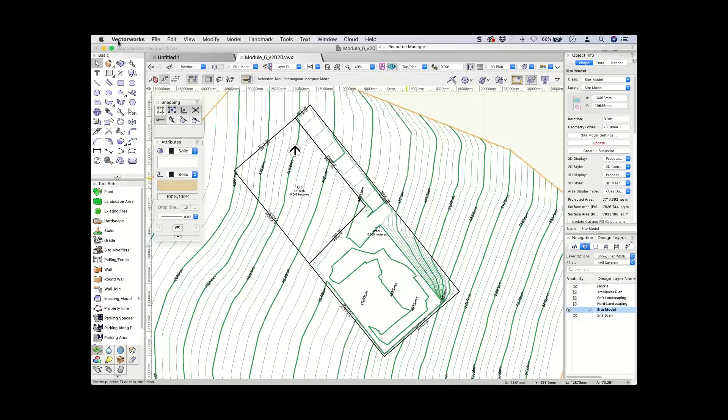So you guys can have some time to come up with more questions. We've got another question from Richard, who would like to see the various site modifier modes again, especially when you use the retaining edge. So that's a good one.

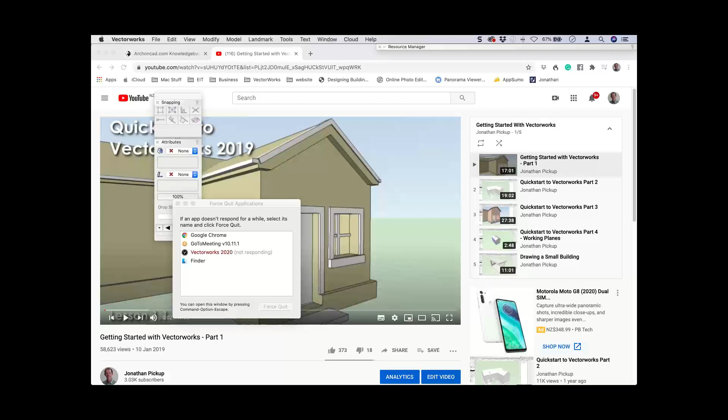So what I'm going to do is create a site model from scratch using polylines. Let's create some polylines. I'm just going to make a rather ordinary site model, and it won't have too many points in it, so it won't take too long to create.

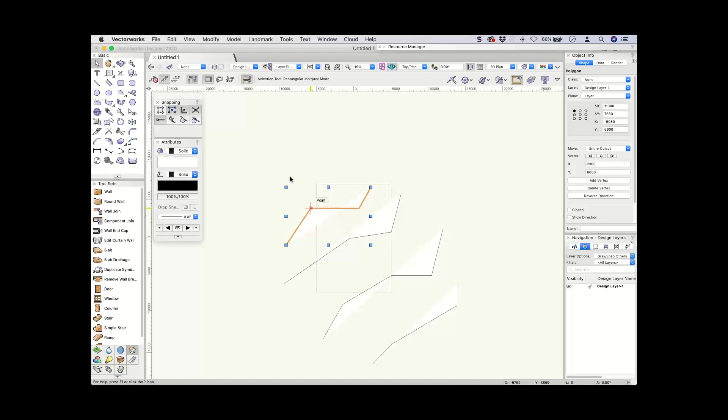One of the easy ways to create it, I don't know if anyone noticed, but I started with this. Oh sorry, do you want to start recording again, Barbara? Yes, we're going, sorry. So I started with a few basic polygons here.

Let's have a look under Landmark. There's a thing called 2D Polys to 3D Source Data. This assumes that you've started your polys at the lowest level, and I have. So my start elevation is 16 meters, and my interval is 2 meters apart.

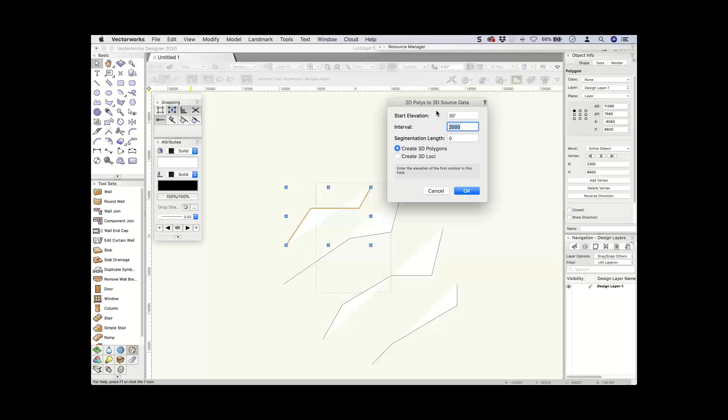Should we make this 30 feet? I think nearly all of you are American. So 30 feet apart, 6 feet apart, and I'm going to create 3D loci.

And it finds the first one, great. Yes, it only found the first one. Weird. Let's do that one again.

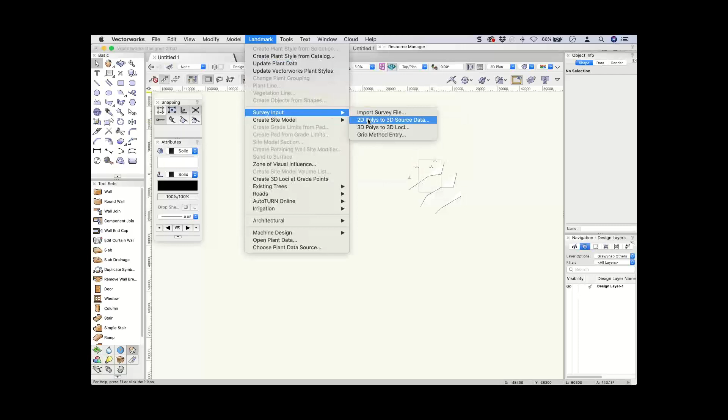Survey input, 2D polys. Where's it gone? It should find all of them. So what was it? That should have been 36 feet with 6 feet apart.

That's better. Okay, let's delete my originals. So I should have a lot of 3D locus points around. Let's select them all. And then they all are.

So we select all of those, then we can make a site model. So Landmark, Create Site Model, and create the site model from my source data.

There it is, and my general display shows maximum elevation, minimum elevation. Do check these maximums and minimums to make sure you have got all of your points and you haven't got one at 0 when you don't need it.

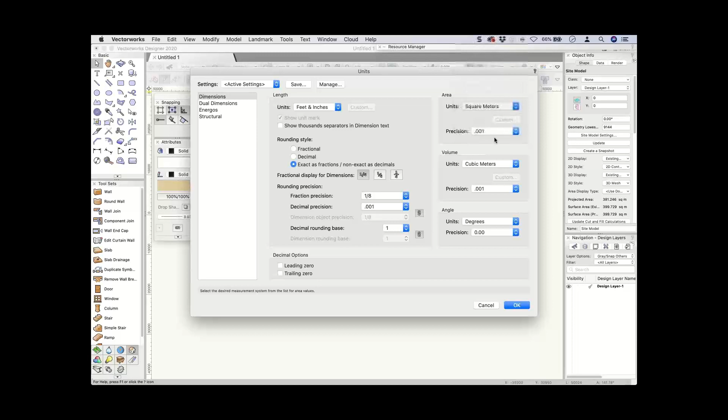So these are going to be 2 feet apart, and the contour is going to be 2. Now I'm just going to change my units to feet and inches, under Document Settings, Units. I'll also change this to square feet, cubic yards. Okay, so there's my site model.

It's reasonably steep, so it's steep enough to do some of this stuff. So first of all, Scott, your first challenge: being able to use this to cut in something like a wine cellar.

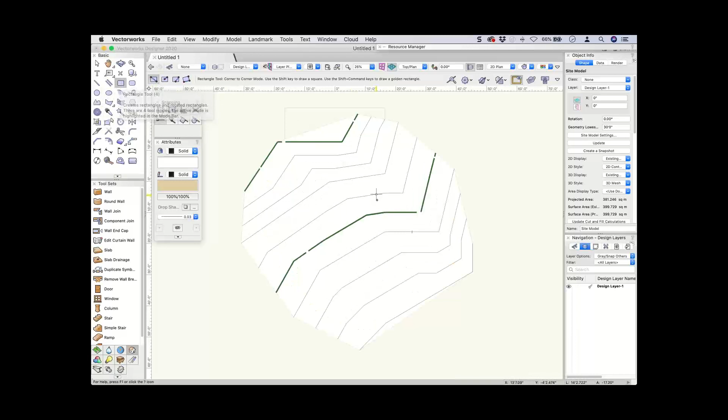So let's say, for example, there's our house. Should we just draw a house there? There's our house. We want to put in a wine cellar somewhere.

Now, there's a couple of ways to do it. One way might be to use something like the Site Modifiers tool, this one here, my bulldozer. The Site Modifier tool will create a site modifier. We can create grade limits, I'll get into that, a contour, or a pad with retaining edge. So one thing we might try is a pad with retaining edge.

This is what you're talking about, I think, Richard, the retaining edge, which I sometimes like and sometimes don't like. And so I'll go through some of those settings. This is a spoil pile and this is a texture bed mode. So I'd like to look at perhaps the contour mode and this pad mode.

So first of all, Richard, sorry, Scott. First of all, Scott, let's just draw your wine cellar, and we'll go yes to that. And here's my wine cellar, and I'm going to change this to an elevation. Where's my elevation? Elevation here. Let's make that 30 feet, because I know that 30 feet will be okay. And this is my house.

So at 30 feet, when I update my site model, and what do we want to see? 2D, we want to see 2D contour smooth. We want to see proposed and existing. And 3D, we want to see proposed only. And you can see it there. It's created a hole. But what you might notice, Scott, is that when it created the hole, it didn't limit the amount of cut for that hole. So what we really wanted was a pretty steep side.

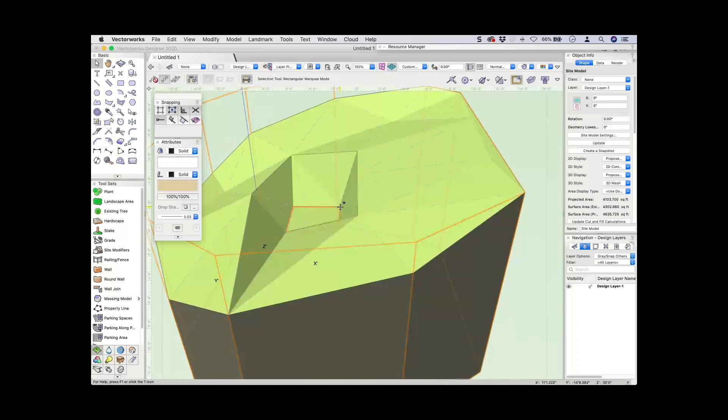So what I'm going to do now, I'm going to change this to a pad with retaining edge. Let's update my site model. And it hasn't changed because what we do need to do with this pad with retaining edge is to make some changes to it. Here, let's just go to here. It's a pad with retaining edge, and I'm going to go send to surface. So let's go landmark, send to surface. I think I can right click on it and go send to surface as well. Is there a send to surface? Oh, it was there, wasn't it? Send to surface there.

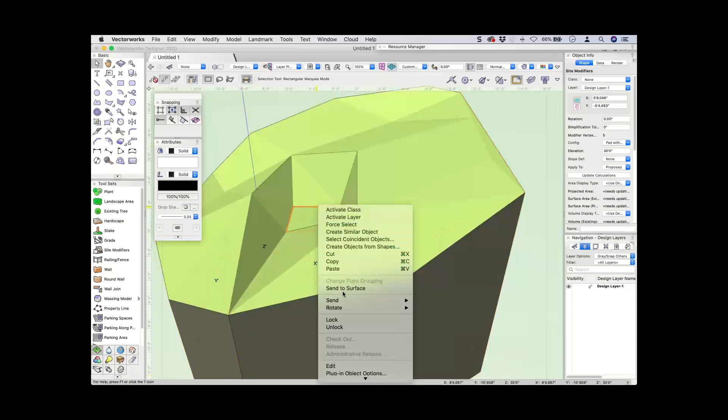So what do we want? We want to elevate the retaining edge or fit the retaining edge or elevate the pad. I'm going to go to fit the retaining edge, and it should give me the opportunity to send this retaining edge to the boundary, to the edge of my site model. So I didn't do that. Send. So it's a pad with retaining edge. That's correct. Elevation 30, slope definition 0. And I want that to have the retaining edge on it, and it's not showing up.

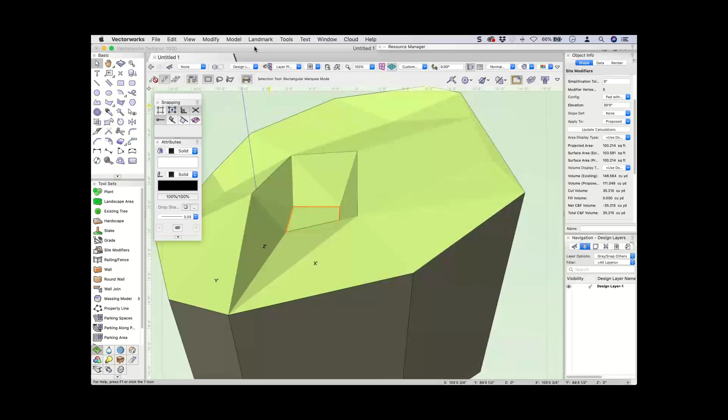So landmark, send to surface. I want to fit the retaining edge. Now, normally it asks me which edge to send it to. So since it's failing to do what I want, I'm going to do what we talked about, Richard, some time ago, and that is I'm going to create a site modifier around it to be a grade limit. A grade limit will limit the extent of my cut. So that's a grade limit. So when we go update this, we should end up with that just fitting.

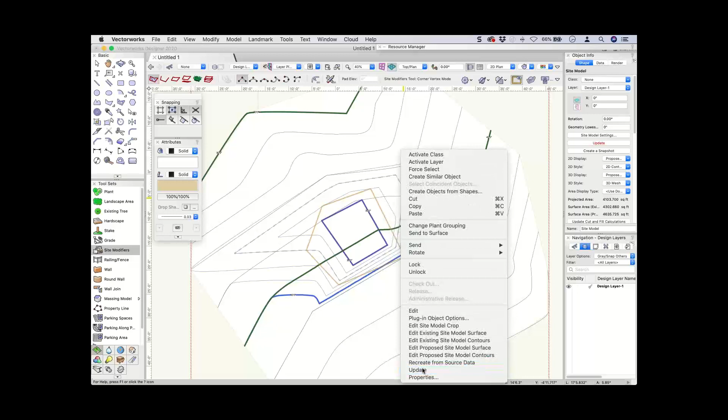So, Scott, let's talk about some rules. Rule number 1 is you can't have a cave. And what that means is that you can't put a site modifier like a cellar, wine cellar. It can't actually go under the site. We can't make a hole underground. So that's number 1. If you want to put a wine cellar in the lawn and have lawn on top of it, I'm afraid you're going to have to do 2 bits.

One is you're going to have to make the hole for the wine cellar and the edges. And the other thing you're going to have to do is to put a form on top of it to close off that site. Now, an easy way to do that would be to do something like make a copy of the site model and shorten it so it matches exactly.

So let me go back to your original question, Scott. You want wine cellars. Okay. Your wine cellar's off to the side, so there's no house over it. That's cool. So I think that looks at the basic strategy, that you can just create something that's a site modifier. I'm going to delete these parts again.

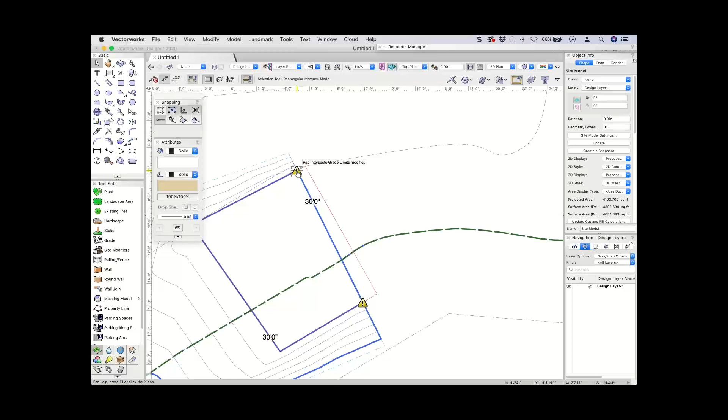So what you can't do is, so this is my grade limits here. If I make this grade limits go over my site modifier, like this one, and I update, I start to get error messages. These error messages are telling me that the pad intersects the grade limits modifier. You're not allowed to do that. Now I know that Vectorworks does it because it works, but sometimes the results in 3D are not what you expect. They can come out a little weird.

So for example, in this case here, you can actually see that my pad modifier is going underground. It's actually going under the slope here, and part of it is hiding under the ground, so it's not correct. So Vectorworks doesn't like those parts, and it won't do them effectively. So let's get rid of that. Let's update this again.

Update. So Richard, you wanted to look at the various types. So let's go back to our site modifier tool. The contour is a really easy one to use, especially if you use this one here with the snap to contour elevation. So I've got some contours here. This one's at 40 feet. So I should be able to click on that one.

Then I can start to move these around. Now, I'm just going to check to make sure it's updated, and my site modifier, because what should happen is, I don't know if you noticed that one there went red. We're looking for these to go slightly red so that we can then use those to link to, and then what Vectorworks will do is it'll measure the elevation of that contour, and it'll set this modifier at exactly the same contour.

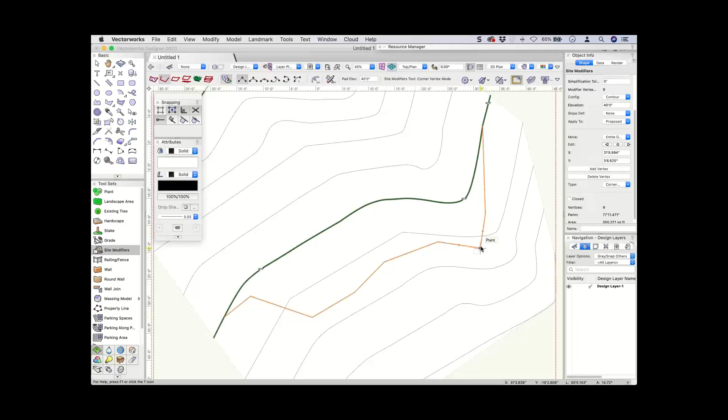You can see here it's set it to 40 feet because I started on that 40 feet one. And this one, it's measured the edge of that contour, and if I make some contour lines like that and finish, that one should be at, I forget what I made it, something like 38 feet. That's cool. So let's update this site model and see what we get. And you'll notice that I'm showing both proposed and existing. Let's show proposed only.

So it's a little confused. Here's my 40 contour line here, and you'll notice that even the contours way back here have been affected. And they've been affected because I haven't created a grade limit. So I haven't said limit my changes to this area. So I need to go back and put in a grade limits. So my grade limits needs to go around this area that I want to be affected, and through this area that I also want to be affected.

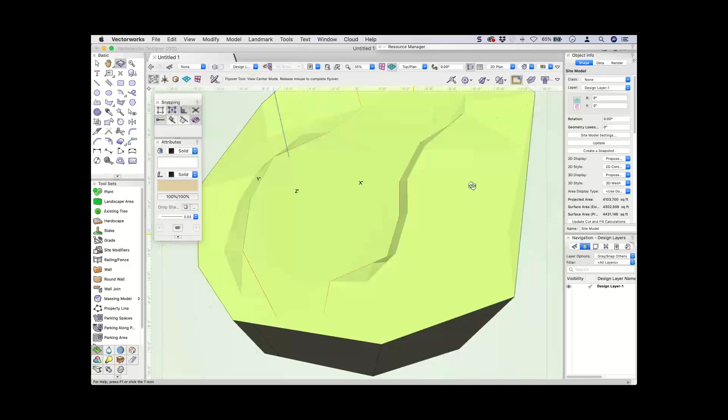Now, the closer I make these to my original shape, the steeper the batter will be, the steeper the edge will be. Where did we start? Over here somewhere. And let's update again. Right-click, update. Now you can see that I've changed the amount that I've been affected by just to where my grade limits is. If we look at this in 3D, you should see that it's reasonably steep. So Richard, I've got a reasonably steep batter on this edge and on that edge.

So some landscapers like this contour mode because this is how they often think. They think about changing the contours more than changing other things. Is it possible to do this some other way? Absolutely. If we right-click and we choose, where's it gone? Edit proposed site model contours. So these are the 3D contours of my site model. So I can actually double click on one of these and I can move it.

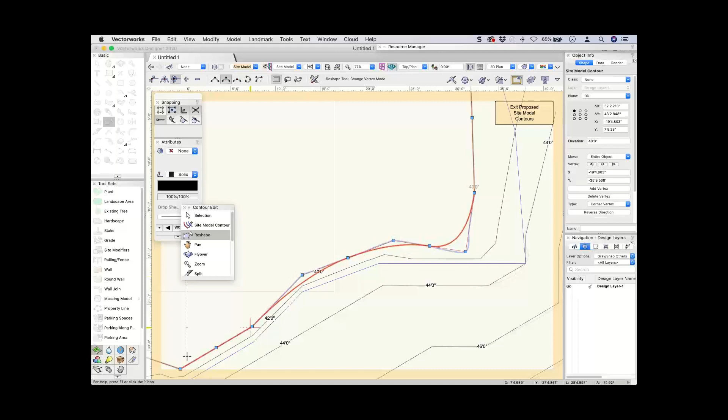So this is a 2D part, and what I might want to do is change these to more Bezier type shapes. Let's go and exit. And I think I might need to update. Do I update? So why didn't it change? Because of the way Vectorworks calculates the shapes. It calculates them not based on the curve of the polyline, but based on the points of the vertices. So the more vertices you put in, the smoother the lines become.

And now I have chosen smoothed. If I choose them unsmoothed, you'll see that some of them get steeper, but if we smooth them, it tries to smooth them out.

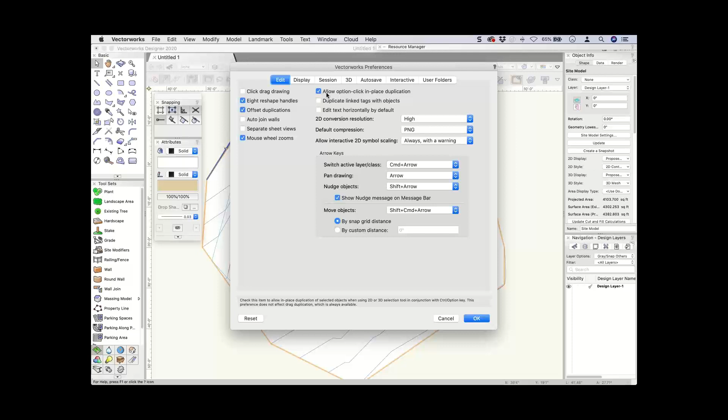So Scott, you said that you've got a cave, so you're going to have to copy the site model and place it over the cave. And one of the ways of doing that is to duplicate the site model. There's a quick way to do it. Let me just go back to my Vectorworks preferences. Allow option click duplication, or on a Windows machine it's called allow control click in place duplication. So if I do that, I can go option key click. I've now got a copy of my site model. It's a completely separate one.

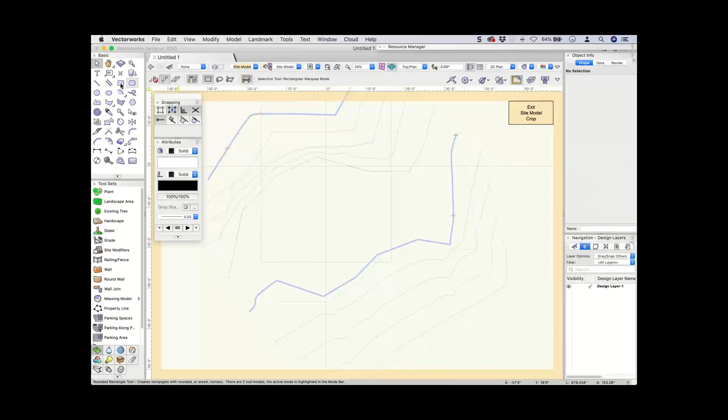And what I would suggest is use the site model crop, delete that shape, draw a rectangle to represent the shape of your cellar, exit the site model. So what I should have is two site models. And there you can see the two site models. The one at the bottom, you just change the bottom of that. So if we go to the site model settings, we'll change the minimum elevation here to, what was it, 38 feet, I think. And you can see you end up with just a tiny little piece of site model.

So let's just pull that over there. So we should end up with two site models, Scott. You can see the two site models. So if you made that one, it could sit as a lid on top of your wine cellar. It's not perfect, but Vectorworks won't do a cave for you, so I don't know what else to do. So that takes care of Scott.

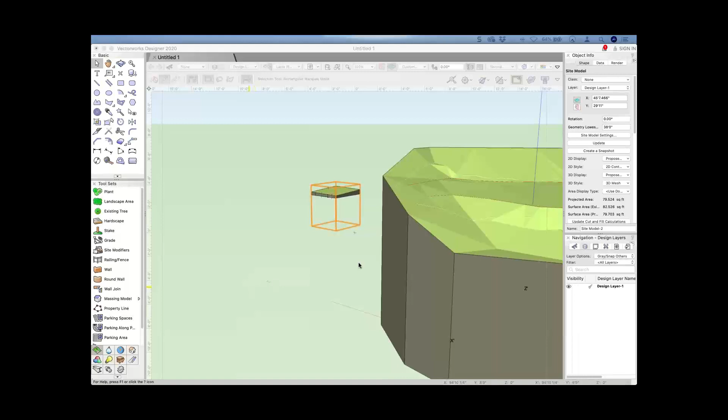So Richard, you wanted to talk about the various site modifier modes. I've got a real challenge using the retaining edge. It doesn't work for me in a lot of cases. Particularly if you're doing anything to do with the structure of the house or the architectural parts, where you've got several site modifiers close to each other that represent the different underside of the house structure. So if you're doing a basement and there's two different levels to the basement, don't use site modifier with retaining edge, just use a pad, because a pad works really well.

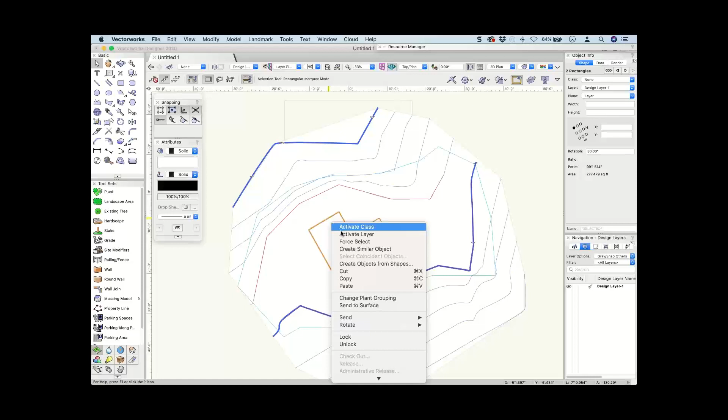I quite often make a pad by tracing around the shape of the house or the shape of my structure. Now you notice I've got these two just separated by a tiny little bit. So we select those two, then we're going to go right click. I'm going to create objects from shapes, and I'm going to make these into site modifiers, which is down the bottom.

So I'm going to turn off the Show Properties dialog box. I'm going to delete the source shape so those rectangles disappear. And I'm left with two site modifiers. Now these two are both at the moment grade limits. So I'm going to change those to pad. Let's start off with pad with retaining edge and see if we can make that work. So pad with retaining edge, the elevation of these, 38 feet. And I'll delete these other site modifiers that I've got.

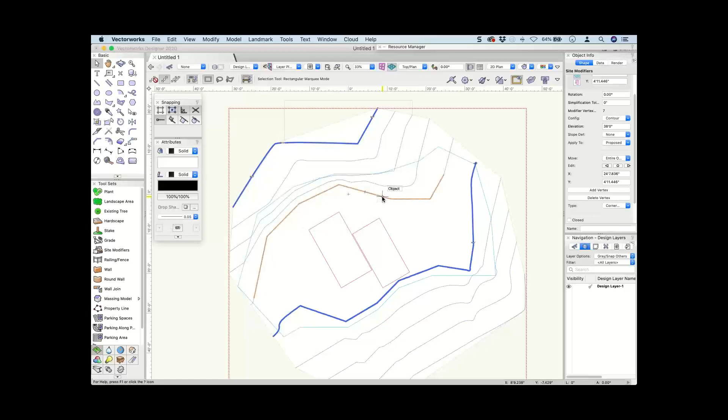Now sometimes I have trouble deleting or selecting a site modifier. You can see there that when I click, it picks up the site model. If I J-click, hold down the J key and click, you can see it actually picks up the dialog box with select coincident objects. And you can see there I can choose the site model or the site modifier. And now I can delete that site modifier. Once I've told Vectorworks I'm looking for the site modifiers, it seems to be that much easier to go and get them. Let's update my site model again.

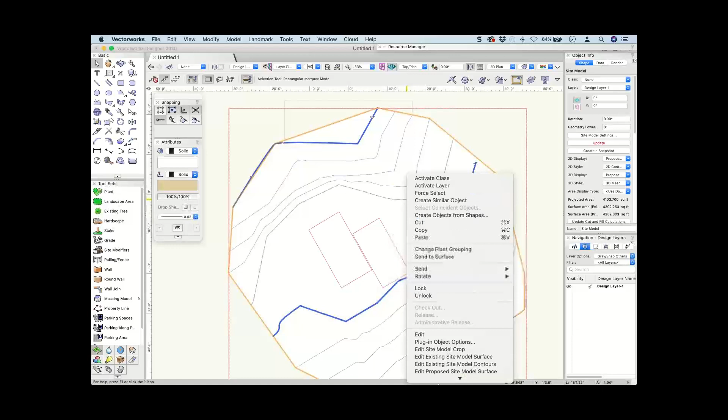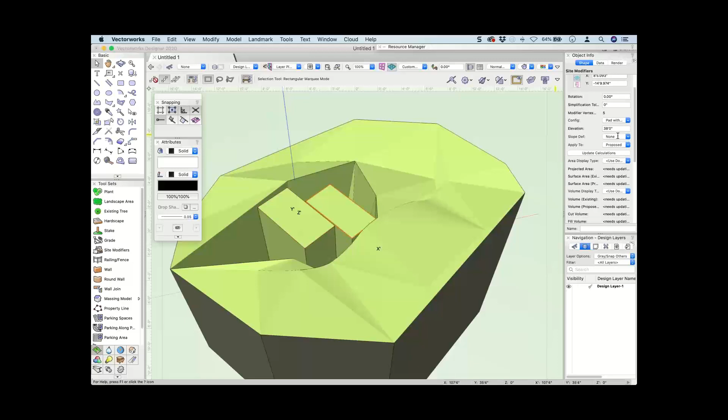Cool. So these two objects here, they're at 38 feet. And they should create some sort of hole. There they are there. Those are pads with retaining edge. Let's have a look. So it's pad with retaining edge, and the slope definition is none. And let's change the slope definition. The slope definition will be the across here. So is that right? 38 feet, yeah, proposed. That's weird because they're going all the way to the ground.

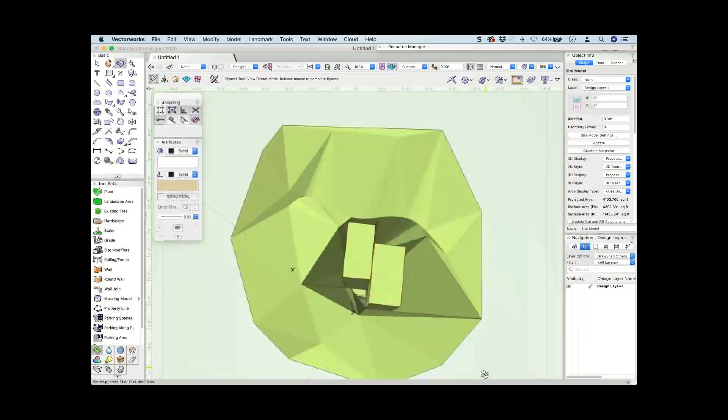Okay, so let's select that and that. Pad with retaining edge. Let's make sure that we've got here send to surface. Elevate the retaining edge: choose to elevate the vertices to meet the site model surface. That's what we want. Now that should have lifted up the edges. They should have come up high. Now if I update this again, it's still not working. There's something going wrong with that retaining edge, because they're at the right elevation.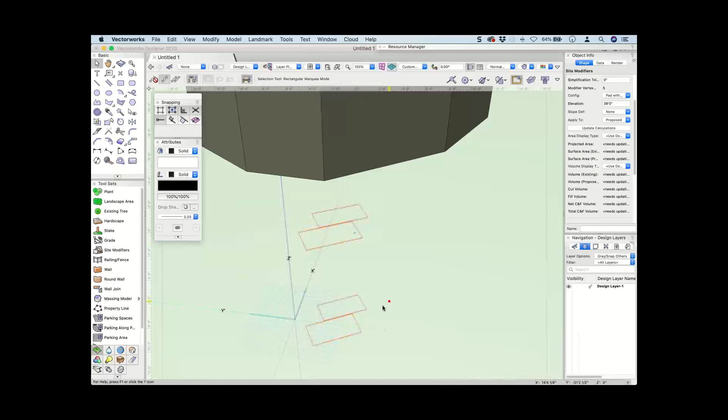But what I was expecting to find is when I do the lift, the retaining edge, I'm supposed to get a dialog box that asks whether I want to go to the proposed site model or the existing one. So I'm going to see if I do this one again. Let's go send to surface again. What's that? That's my site modifier. That's my pad with retaining edge. I appear to have two of them.

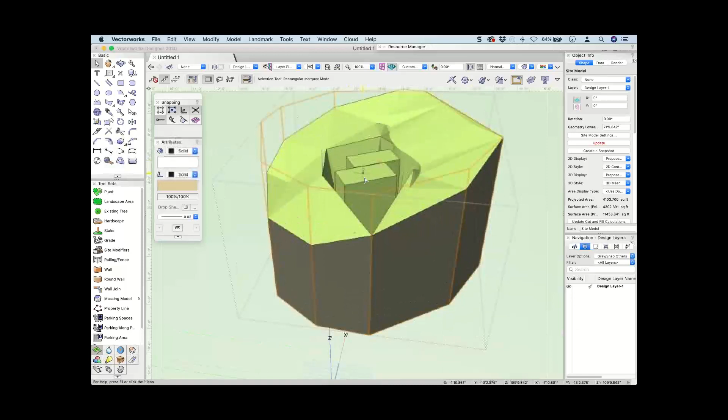Okay, let's not get rid of this. Let's keep those two. Let's send those to the surface, see if that works. Send to surface. And I don't know why I've got two of them. You can see I've got that one and that one. And now I think I've deleted my retaining edges. So what's that? Yeah, I thought so. Normally those retaining edges elevate to the site model, which is weird. I don't know if anyone noticed, but I've actually got two of them, one here and one there, every time I've tried to do it.

So I'm going to change those from pad with retaining edge to pad, and this should have the right 38 feet. That's 38 feet, isn't it? 38 feet there. Now my site model, I hope, isn't at the wrong elevation. Geometry lowest, I think I've accidentally moved this up.

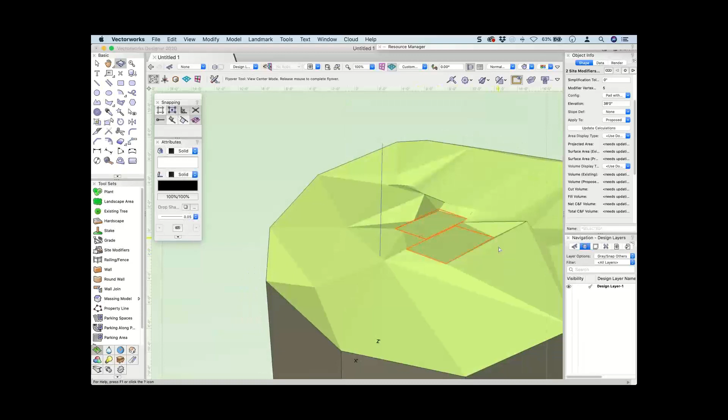That's better. That explains quite a lot. Okay, so those are my pads. That one, so again, J-click, site modifier, and that one. Now let's try this. Send to surface. Pad with retaining edge. Send to surface. Elevate. Okay, so there was a slight change there. They slightly elevated. Let's update this again. And there they are. So there's a slight part here.

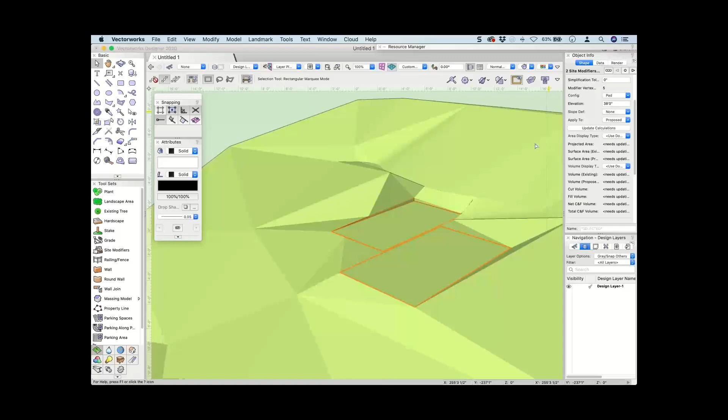And so Richard, one of the things I sometimes find with these is that if you send these to the surface of the site model, you sometimes end up with these pads putting a line between them. So when I've got two of them like that, I select that one and this one. What I tend to do with these is to turn them into pads only and put a site modifier around them. So the challenge we've got, Richard, is how do we get those site modifiers to give me exactly what I want, a really tight fit to those. We're going to make this 36 feet.

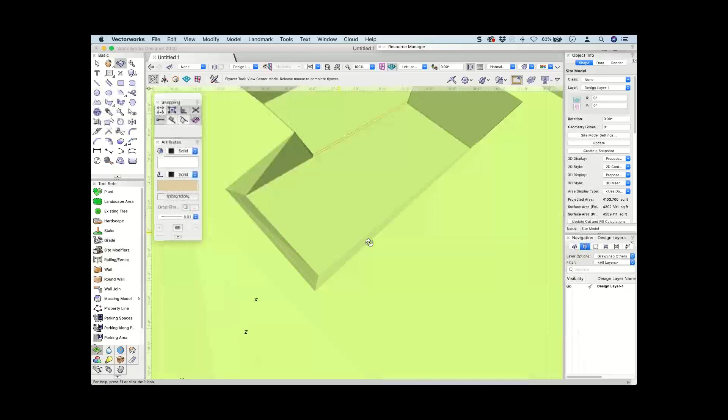So I'm going to use my offset tool. I'm going to offset a copy by 12 inches. I've got two of them. I'm going to right click, select them both, add surface, join those two together, and then change those from a pad to a grade limits. Now grade limits can go around several pads. So when I then update this one, I should end up with two different pads and the hole that I want. Like that.

And I can then select individual pad modifiers, that one, and that one can be at 38 feet. Let's update. Right click and update. So I can have different pads of different heights in the same grade limit. So if you want to make steps, I've done one recently where I made terracing down a hill, so I did that.

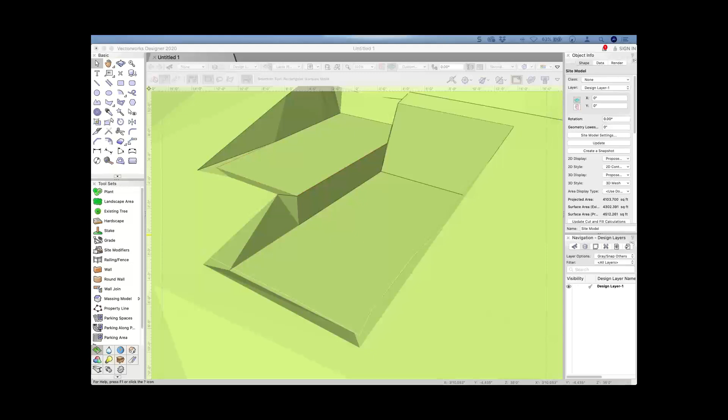Someone's asked, can the modifiers be touching each other? You can't touch modifiers together. I don't know if you noticed, but mine ever so slightly were apart. If they exactly touch, you'll get an error message, even if they just touch. So here, let me just go back to that. J click again, so I select my site modifier. I want to just touch those two together so they actually touch. Let's update my site model. And I've got an error message here because they actually touch. You can't have them actually touching.

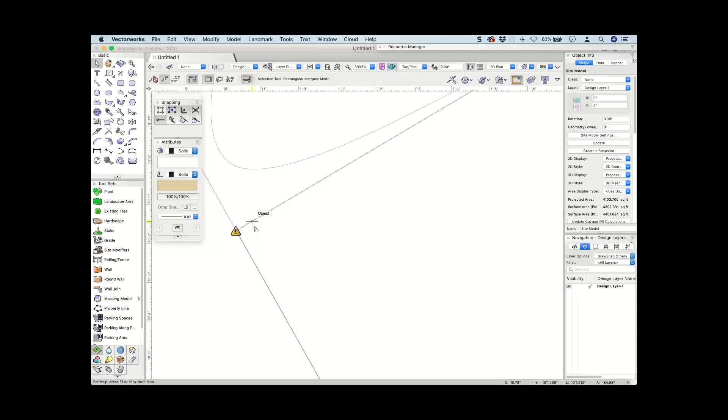How do we move that? Now I work in millimeters where I live. So what I often do is offset them by a millimeter, which seems to work. So J click on that one. And I'll offset this by a millimeter, which is 1/25th of an inch, which is almost nothing. So 1 millimeter. Okay, so you can just see it, but when you zoom out, it looks like they touch, but they don't. And that'll be enough to stop the error message.

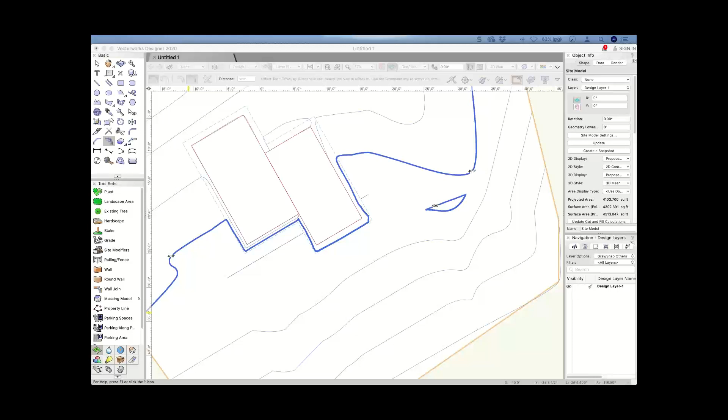I would also be interested in Richard's question on site modifiers. So Rod, is there a quick way to enter minimal site data without a survey? I'm not sure if I just did that for you by doing that. But there's a couple of ways to do it. So Rod, one way I'd suggest, I've got something going bing on me at the moment. Okay, so let's get rid of this.

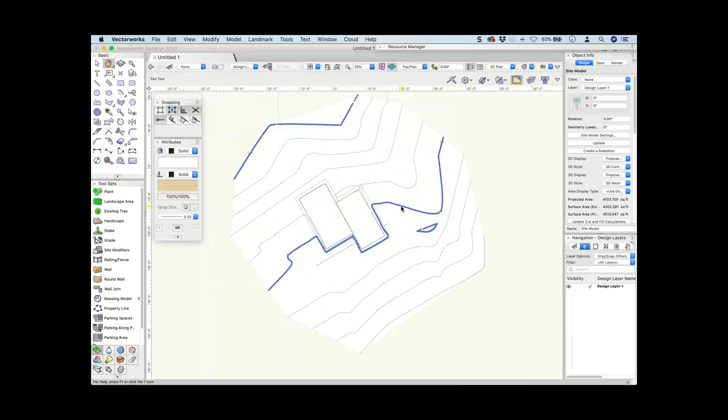Do we have a site model we can bring in? I'm not sure I've got one on my desktop that I can bring in at the moment. I don't have one handy, but don't forget that you can use the stake object to quickly create a site model.

If we use the stake object, let's say for example we've imported an image from a council building. I've got council drawings that have got contours. I'm going to include as site model data. I'm going to use a cross. I just like a cross, you don't have to. And so what I'm going to do now is say my elevation is 30 feet. And then you can place a couple of these.

Yeah, so that should be fine. So I can just place a couple of these. So those are 30 feet elevation. And then I can change this one to 34 feet elevation. So I've got another contour line at 34 feet. And I can place those again.

One at the end. Let's just cheat and we'll just jump straight to 40 feet. 40 feet elevation, let's put some of those in. And then select all of those. Don't forget your select similar tool. Select all of those, Landmark, create site model. And it will create a site model from those stake objects.

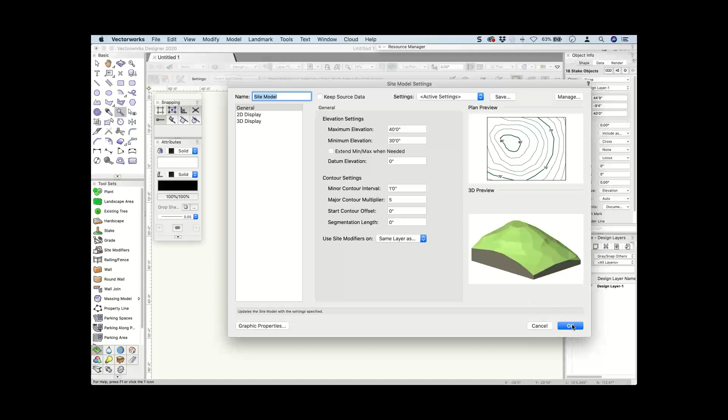There it is. If you want to add extra stakes to it, right click, recreate from source data is the option. It used to be called something different, but it's now called recreate from source data. And we go, oh, we've got some more information now. What we'd like to do is we'd like to put some in at 38 feet.

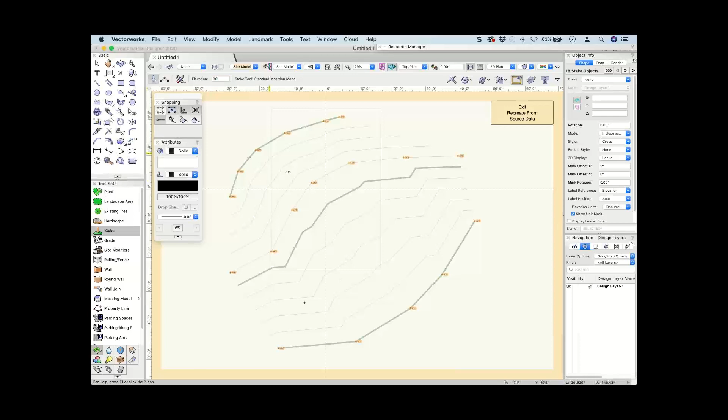So now what I can do is I can put some more contours in. I know that these ones are 38 feet around here. You can use copy and paste, so you can actually copy and paste in place. And it recreates your contours when you come out of that. So it's quite quick, I think, to build a site model if you've just got the limited data, and you can always add more information to it along the way.

So what did we get up to? I started looking at Richard's question about the site modifiers. We looked at this one, we've looked at that one. We have looked at that one again, and I think we've looked at the grade limits. I'm actually amazed at how much you can build with a site modification just using the contour mode and the pad mode.

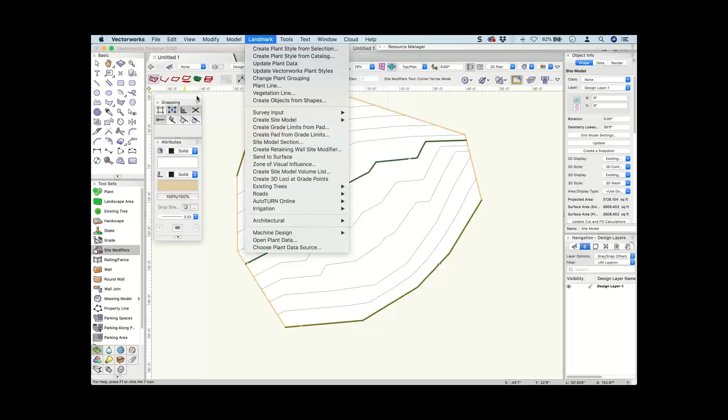Now there are other options you've got. So one of the things you can do with the site modifying is you can create pads from grade limits and you can create limits from pads. Sure, these are quite cool, and you can create a retaining wall site modifier, but I have found that although these do work, some of the simple things like just creating contours work extremely well. So let me show you what I mean by the contours.

I have a contour, I want to create a contour. I'm going to use that contour mode, can use the magnet one again. I want to use this contour here, and sometimes what I do is I update it to make sure it works, make sure it finds that contour. So I'm going to create a contour that goes around here, follows through here, comes back up here, and what I'm doing is I'm clicking and dragging.

Okay, so that didn't find that elevation that I needed, so I need to physically move this to, I think that was 35 feet, elevation 35 feet. And now I need to create, don't forget you've got to create your grade limits. The other contour, I've done this before where I just do the contour out here and I just put in the heights that I want, or I just put that where I want that one to be.

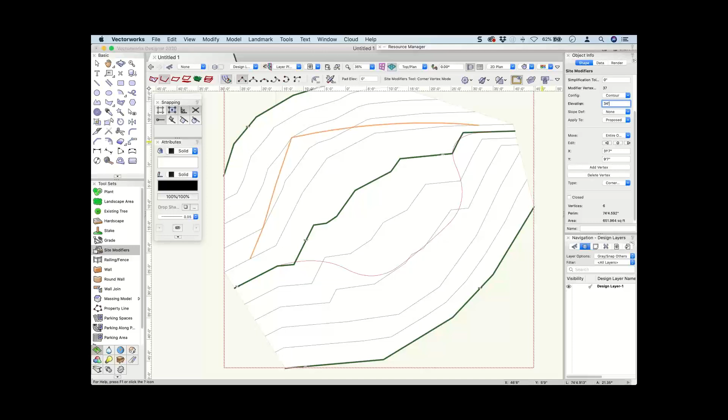And that one must be 34 feet probably. 34 feet. And then we go update, we update the site model, and it should all be sweet. Now, if it's not changing, have a look to see what my 3D display is. Let's change it to proposed only. 3D display, proposed only. 2D contour smoothed, proposed only. And there's my updated one.

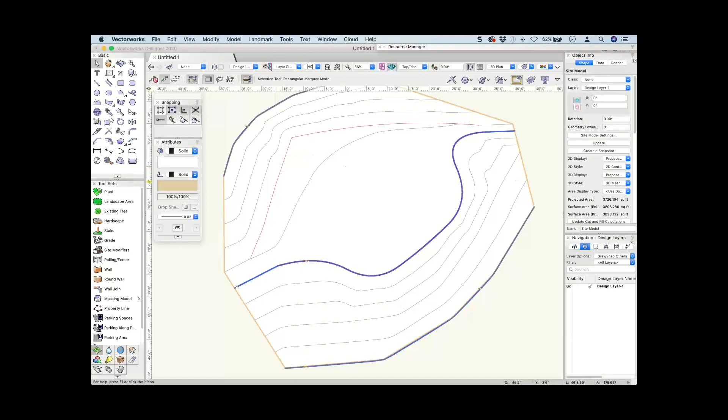Quick way to enter. Oh, Rod, sorry, never mind.

So Richard, you got another question? A driveway, no curb, to a street that has a cutout, a curb cut. I'm sorry, Richard, I don't understand what a curb cut is. So I've done the wine cellar. I've done that one. Someone's got a request. Oh, it's a long question. Use Vectorworks Architect, not Landmark, and of course Vectorworks Architect includes some Landmark tools. I wish there were a few more tools ported to Architect.

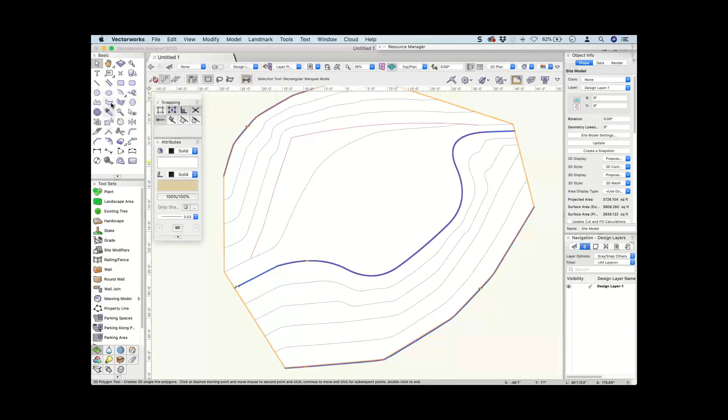The create retaining wall tools, I actually don't think you need them. If you build your, where's my site modifier? If you build your retaining wall site modifier to closely follow this curve, we'll make it go further away down here. This as well. Let's update that. So if we have a look at this in 3D, you'll notice that I've created quite a steep curve here.

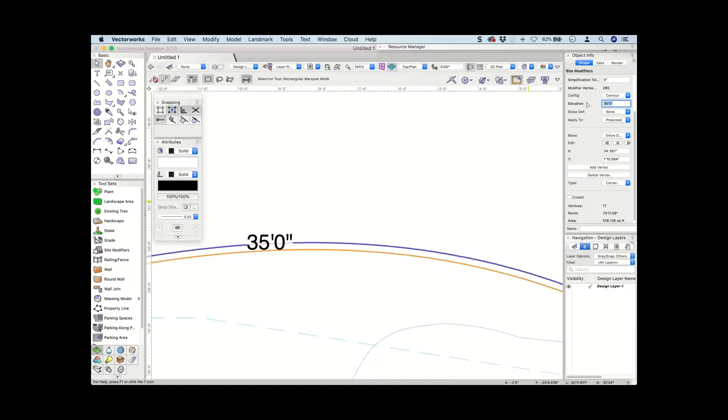Now, if you want to make sure that it's really doing what you want, don't forget you can offset this line. So this is my grade, this is my site modifier. Let's do the offset tool. We'll offset this, we'll offset a copy, and we'll offset this by 2 inches. And we'll change the elevation of this to 37 feet. Let's update our site model.

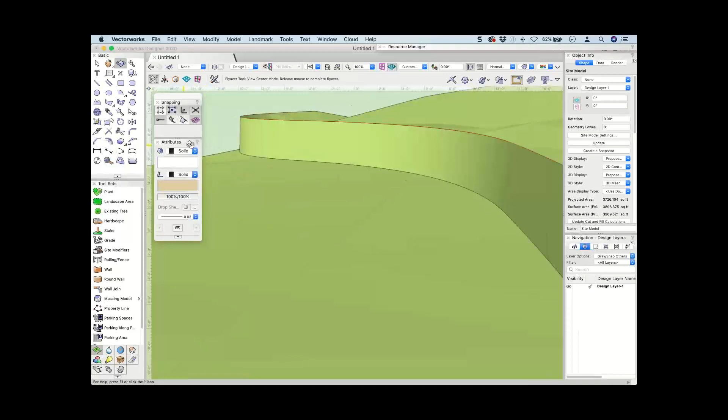Now I've made the top edge just a little bit high, if you notice. But that looks to me pretty much like a retaining wall. Now, I know it hasn't got the texture, I know it hasn't got an actual wall in front of it, but to modify the site, the tools you've got in Architect will do that.

Barbara, you can hear me all right? Someone's just reported there's no sound. I can hear you perfectly. Okay, I'll get rid of that.

A street with a curb. So Richard, if I go back, you want to create a driveway with no curb to a street that has a curb. Oh, that should be reasonably straightforward, I think, Richard. I don't know if anyone else likes using this.

There's a tool here called, where's the roadways? So, roadway poly. So you'd have to do it in pieces, Richard. You know you can use the roadway poly.

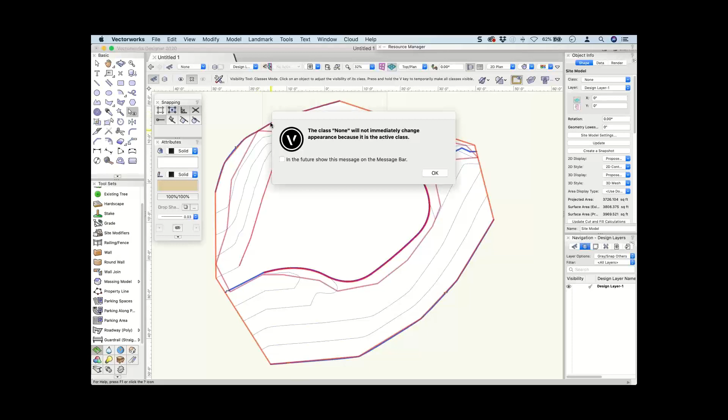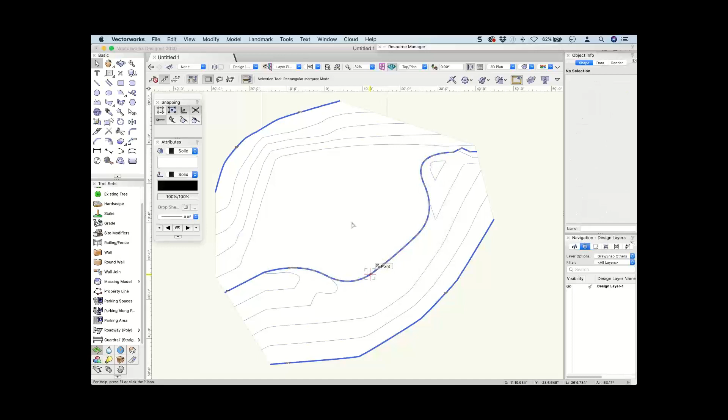Can we get rid of all my site modifiers? Again, you see it doesn't want to select just those site modifier objects. X is that site modifier? Yep, let's get rid of that. I've got a couple of site modifiers here I think I need to get rid of. Let's get rid of those. Let's update this again.

Okay, so Richard, we've got the roadway poly, which we could use. So there's my roadway poly. And I can send that to the surface of my site model. So I'm going to make the road paving width 9 feet wide. So I can send that to my site model.

But you want another road coming in to join that one. I think that's what you're talking about, isn't it? You've got another roadway that comes down here and joins in here. Now, there's no roadway joining tools. That's not like wall tools where you can actually join them together. I can't do that. But what I can do is I can use this other road, which I quite like, which is called the custom kerb.

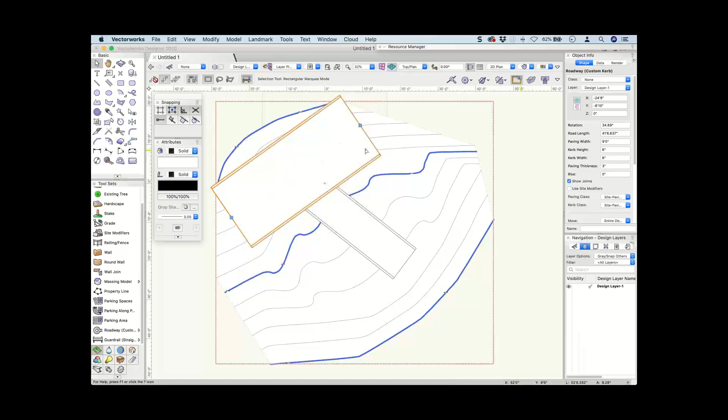Because the custom kerb road, I can draw from there to there as one custom kerb, which is 9 feet. And I can draw another one, paving width 9 feet. That's not right. Let's start that one again. Custom kerb. Let's put in my width here as 9 feet. So I'm going to draw from there to there with one road, and from here to here with the next road.

So I've got two different roads, Richard. You do need to do this in two different parts. So this one's got no curbs. And the way you do that with the custom kerb is you use the reshape tool and you turn off the edges.

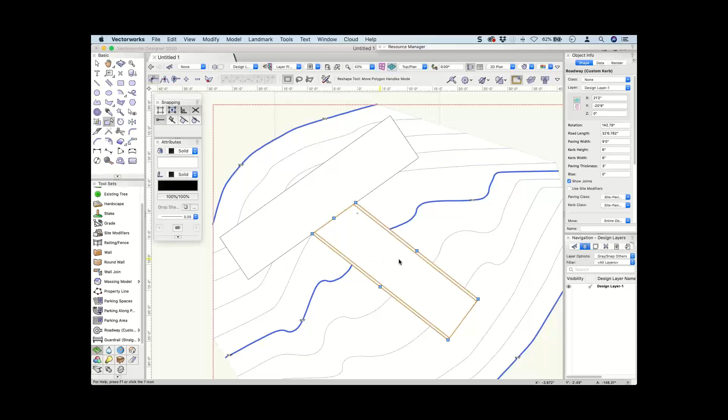And then this one is a completely separate one. And this one I can move these points. So I can actually move that point there to touch that edge. And I can move this corner back to touch that corner there. And then you've got the two coming together. Got to be careful with the elevations of these. The other thing I like about this, Richard, is that if you wanted to create a joint here where the two curbs come together, what you do is you start adding extra points to your custom kerb.

I don't want to add them that way. Let's undo that. I want to use corner vertices, so I've got my road comes out to there, and then I'll bring this corner back into here. I'd need something to line up with, and then I can turn off that kerb at that end. No, I just want to turn it off at one edge. Oh.

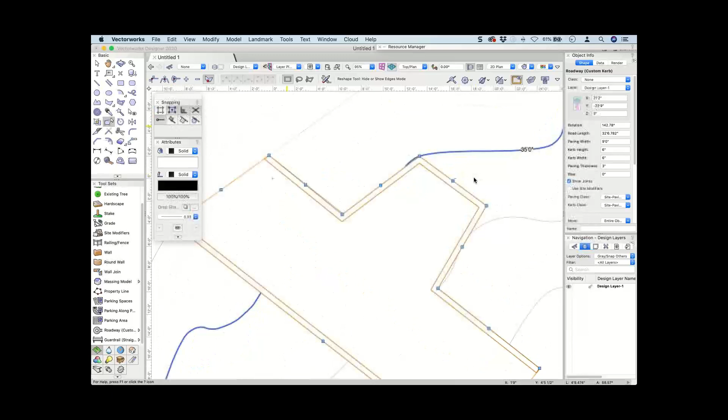Okay, so let's go back to my reshape tool, turn off one edge. Now, clicking on that one should only turn off that edge there, but I did notice just before when I did it, it turns off all those edges, which is not what it's supposed to do. Oh, that's weird. Look, it's turning off parts that it shouldn't. Yeah, it's supposed to, Richard, it's supposed to turn off the bits that I'm clicking on, but it's obviously misbehaving for me today. I'll have to check my update, make sure I'm using the latest version. But the idea is supposed to be that if you've seen me do this before, that you can actually go through and make loads of changes to these.

Have I got two there? Okay, let's see if that was it. It's still funny because I click on that corner and it's turning the other one off. What happens if I click on that one? Yeah, weird.

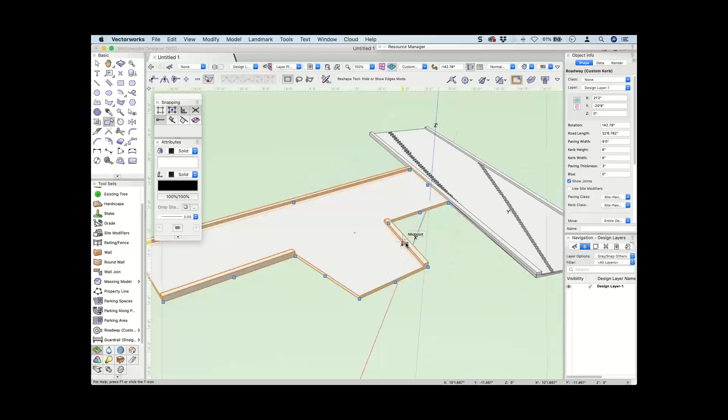And that road shouldn't, this is a custom kerb again. And it says it's got no kerbs, but they're obviously there. Unless I got two of them there. So, oh, that's my roadway poly. That's what's still there.

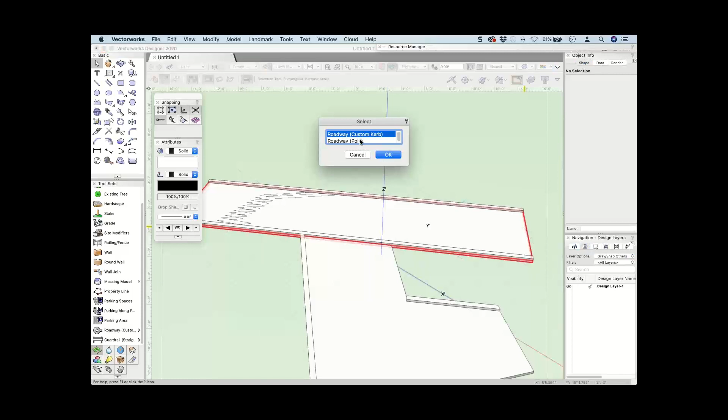Let's get rid of my roadway poly. So there we are, Richard. I've got that kerb coming down and the other one not. I just don't know why I'm not able to turn these off correctly. It could be that I need to update my Vectorworks.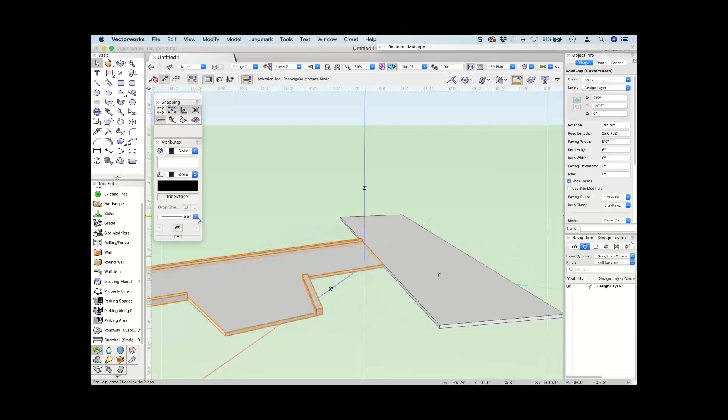So what other questions do we have? Quick way, Rod, we've done the quick way. Scott, we've done your thing. We've done the can't touch each other thing. Site modifiers. Yep, Will, I think I've done your one. I think I've done all the questions. So no other questions now. No, okay, so maybe I can get... Yeah, looks like we've done it all.

So what I'd like to do is open a file and have a play with it. I'm going to open up that file that gave us a problem just a minute ago. I'd like to give you guys some teaser ideas for next time. One of the things I'd like to give you a teaser about is when we come to create planting and we have plant tags, should we put the tags on the plants or should we put the tags in the annotation part of the viewport?

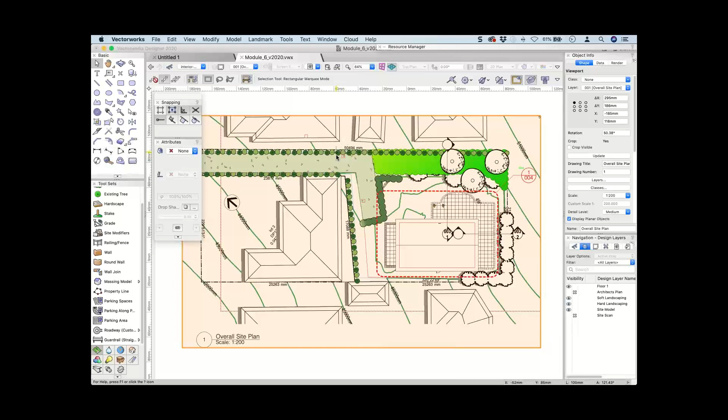So for example here, do we tag the plants? Because these are different scales, this is a scale of 1 to 200, should I put the tags in this one? Or should I go to one of these plans and put the tags here, for example? It's a different scale, 1 to 100, so my tags will look different sizes.

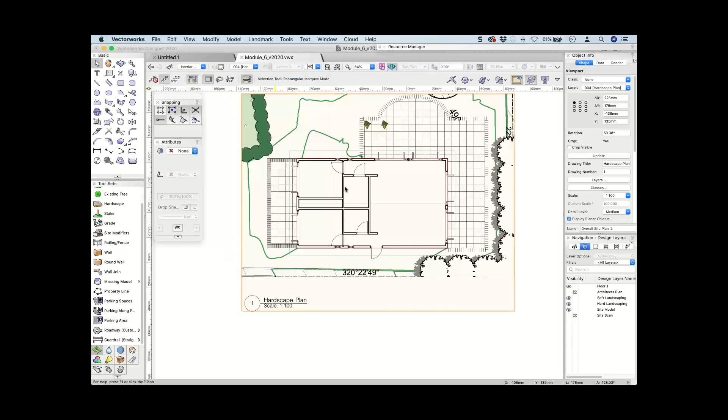We do have one question. Somebody wants curved landscape steps down a hill. Richard's just trying to trick me to see if he can find the limits of my knowledge, I think. Have I got time for that one? Sure, let's have a look. So Richard, you want curved landscape steps down a hill. Well, what curves do you want?

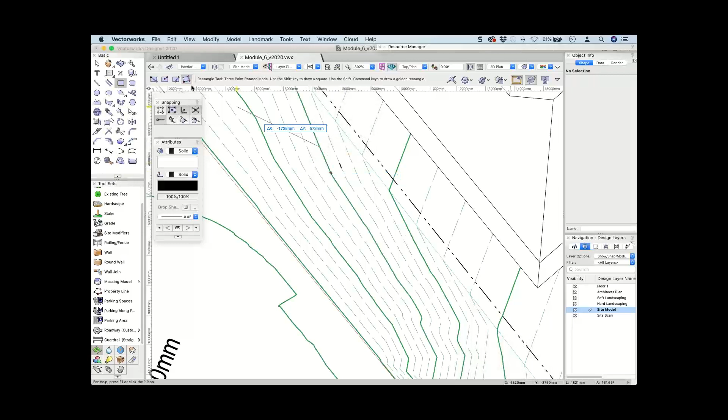I would wonder whether you shouldn't use something like, let's start with a rectangle, because the concept's going to be the same, Richard, whether it's a rectangle or whether it's curves. But you need to create the shape. Now, I'm not sure if you've got landscape, Richard. Oh, he wants them to snake down like a curve. He's just trying to have me on, isn't he? Aren't you, Richard? Okay, so here we are, Richard.

Now, I'm not sure whether you've got - oh, you got designer, so you got hardscape. Okay, so let's do create objects from shapes. We're going to make this into a hardscape. Where's hardscape at the top? Hardscape. Let's delete the source objects. Let's give them a configuration.

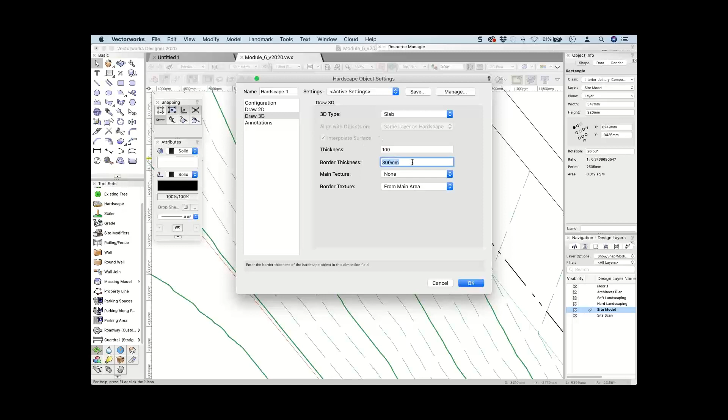Let's draw 2D, that's fine. 3D, it's going to be a slab. Now, if you want to put a modifier in, a slab modifier bottom, it'll actually create a site modifier. I'm just going to have a slab because I'm not going to modify the site. The thickness is, what should we make it, Richard? About 4 inches thick, which is 100 millimeters. The border thickness, also 100 millimeters. There will be no border. And that should be a hardscape object.

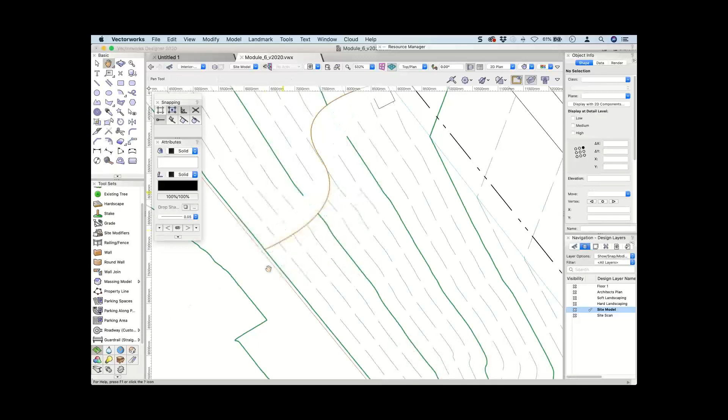So what Richard wants to do is make these wiggle down the site like a snake. So we're going to start here, we're going to make them go like that, and like that. So I've got a couple of choices. I've got these 2 objects. One of the choices I've got, I'm going to start this one here, right? This middle is going to be on the end of that polyline. So I've got my line and my polyline.

There's one here that we don't use very often called duplicate along a path. Where is it? Is it under model? Not extrude along a path, there's another one called duplicate along a path. Here it is, under edit. Duplicate along a path, so I've got a preview option so I can show you guys. Let's say, for example, we think we need 10 duplicates. We're going to make them tangent to the path. Let's preview that.

I don't know, Richard, maybe my path's a bit ugly. Let's turn off the tangent to a path and let's do the preview again. And that's probably not quite what you wanted either, but I think my path's a bit nuts. Yep, there we are. So I've got all those, Richard. They all snake down. I should have left them all selected because that would have been quite handy.

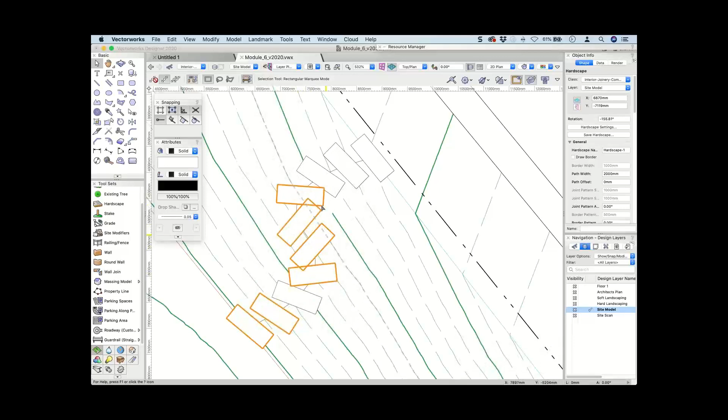If I'd left them all selected, couldn't I also use 'send to surface'? And shouldn't it send those to my site model for me?

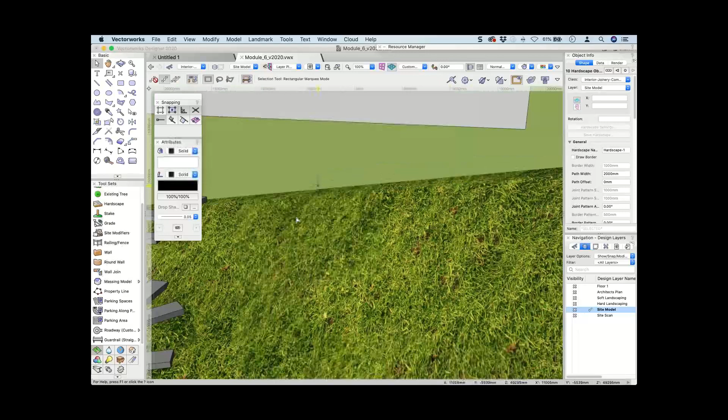Is that what you wanted, Richard? You wanted those snaking down... Now it sent the center of those to the surface, and what you might want to do is just move those down a little bit so they actually just stick into the ground a little bit. And if you turned on the site modifiers, it would actually cut those.

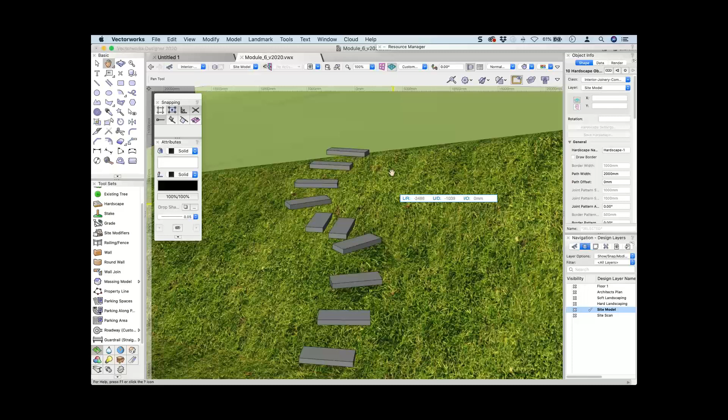And then you can look at these, Richard, and say, well, these, they're not even steps. Well, they're not even steps because the way I created it, they're all still selected. And there might be a modify command I can use, something like Align/Distribute 3D, and it's the Z I want to distribute their centers.

Did that work? It's thinking. Maybe that would work, Richard, to get them to distribute evenly. And then they definitely need to be site modifiers so that they cut and fill the ground in. And so those 10 hardscape objects, I'll have to make sure I put a slab modifier bottom to those. And then if I update the site model, it should kind of work. So I think that would work.

The other way that I would suggest you look at, if you generally want to make a stair, if you generally want to make them to steps, I would look at the Stair Tool. Now, I don't know if anyone's looked at the Stair Tool, but there's a Stair Tool called the Custom Stair. I think we'll run out of time for that one, but the Custom Stair, Richard, you can turn off the stringers, leave the treads, and then draw the shape that you want. And you can also turn that into a site modifier later on if you want.

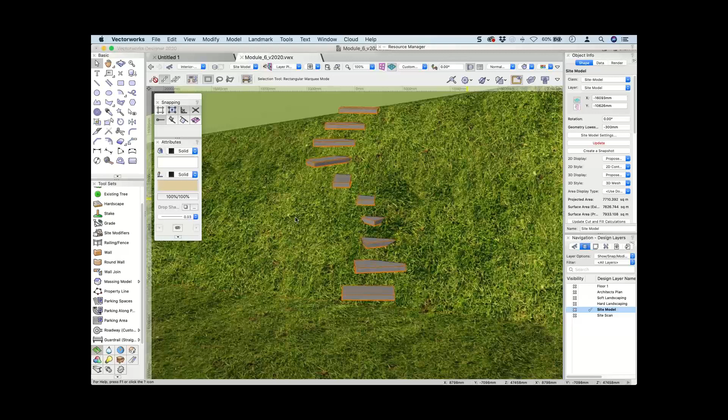So till next time, thanks, Barbara. These are all great tips. Thank you so much, Jonathan.